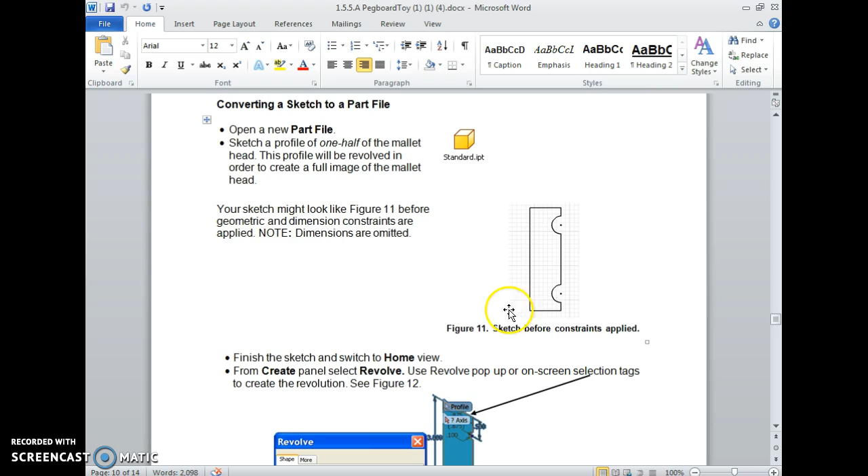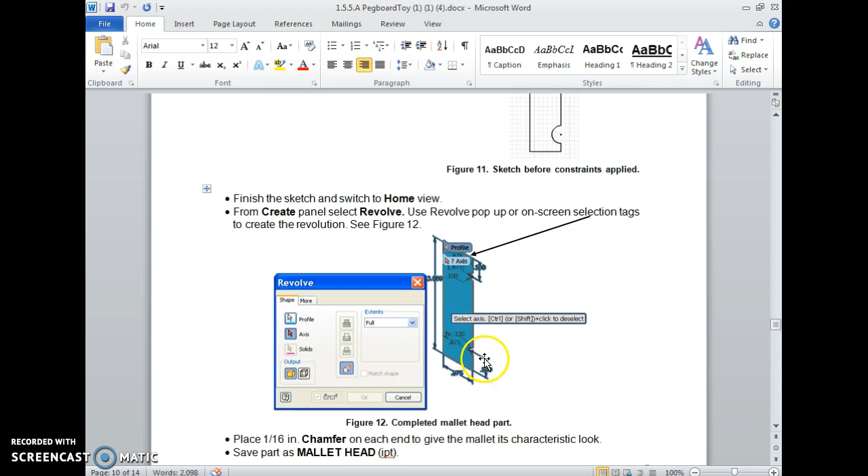And then after we revolve it, we're going to add a chamfer to round the ends off. If I scroll down a little bit, you'll see what the mallet head's going to look like when we get to that point.

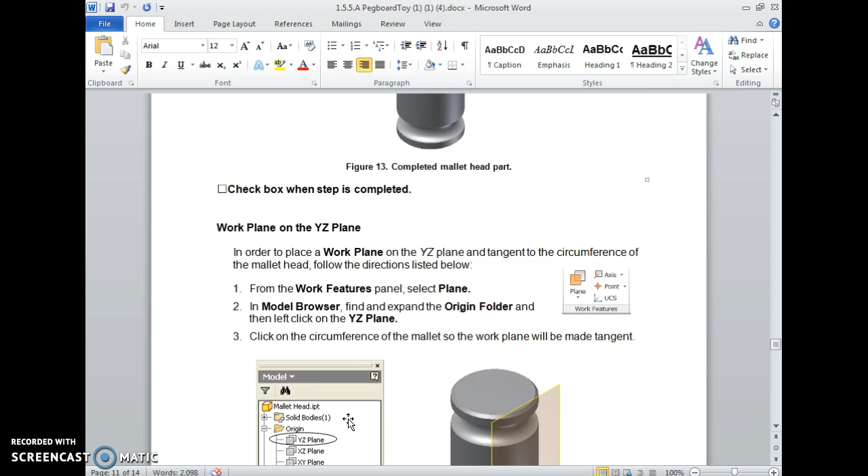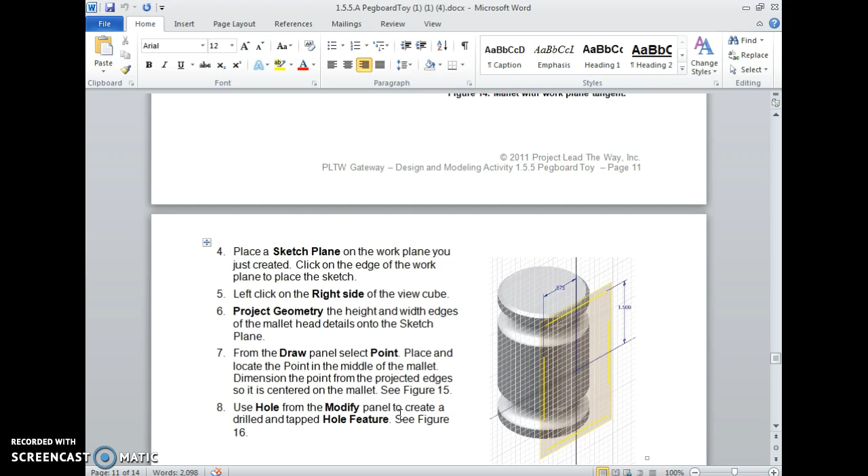Then we have to create a work plane to place a point for where the handle will thread into the mallet head. That's going to get a little tricky. Hopefully I don't mess up too bad. So let me scroll back up here and we'll get started.

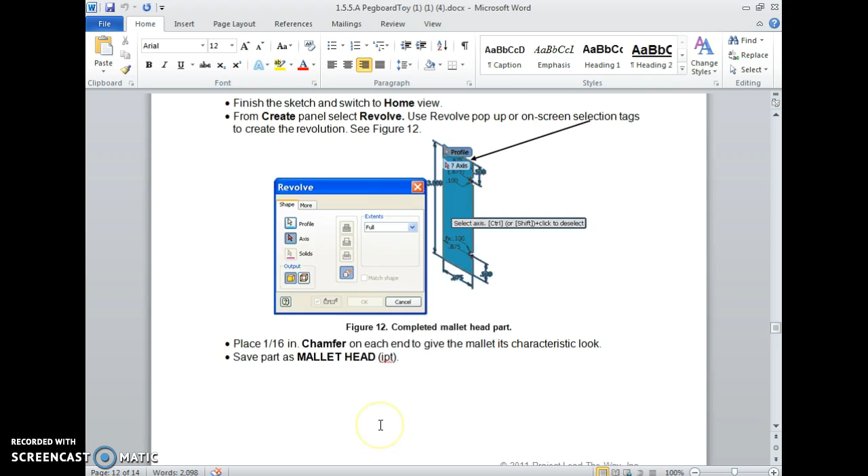So I'm in Autodesk Inventor. I already have a standard IPT open. I'm going to click on the pencil, click on the front view, and start with a line. I'm going to do a vertical line 3 inches tall.

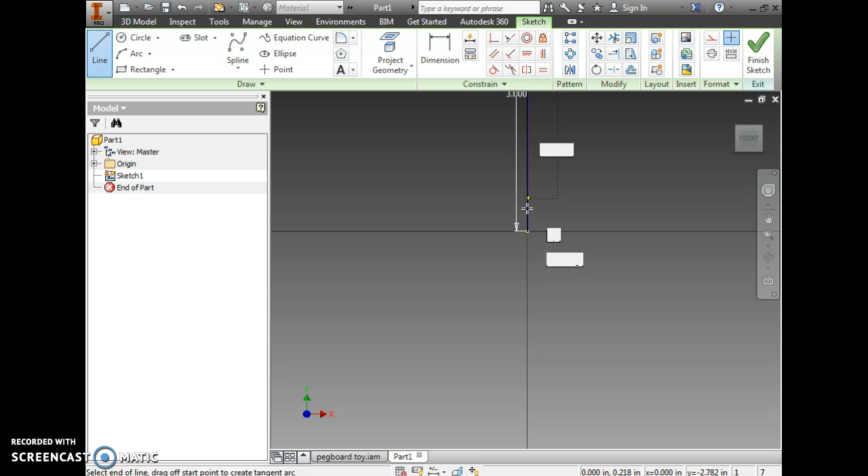Now there's also a way to start with a rectangle. I haven't done this in a while, so I'm going to start with a line. I'm going to continue to use my line tool, and I want to make a horizontal line that is 0.875.

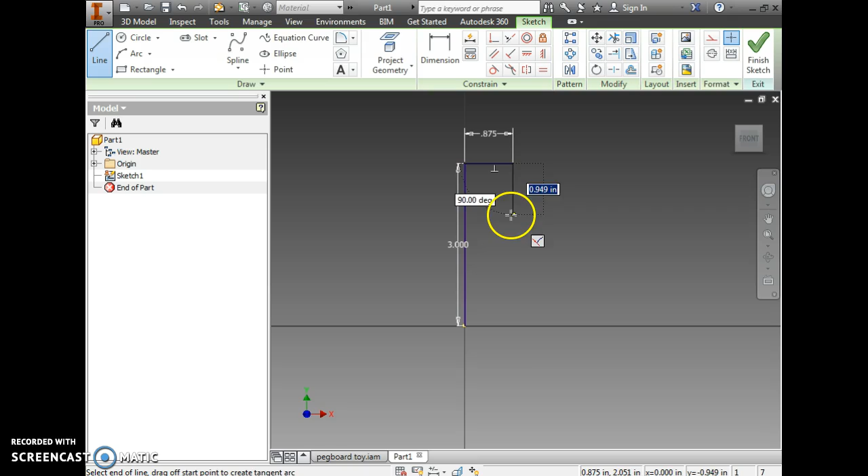So I'm doing one on the top. I'm going to hit escape to unattach my line. I'm going to put another line across the bottom. Make sure it's 0.875 - there's a guideline to show you that it lines up. So I'll go ahead and click that. Hit escape to unattach my line.

And then I'll go and place a couple points and constrain those with dimensions. One there, one there. This is going to be the center for the arcs that we have to place in, and they're going to be 0.5 from the end.

Okay, now I can use my arc tool, and I'm going to switch to a center point arc. In the past we've used 3-point arc - let's try center point.

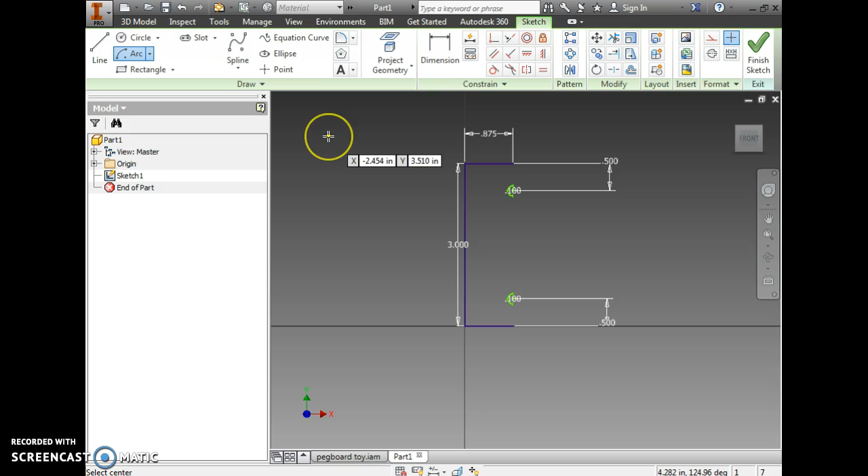We want to set our radius at 0.1, and then we're going to swing that around 180. So there's a little bit of a trick to it. Center point arc, click the center, keep it flat, keep it on that vertical axis. Type in 0.1, enter, and then swing it around to 180. So kind of a new feature.

Back to the line tool, and we got to enclose the profile. So now we have the profile of our mallet head.

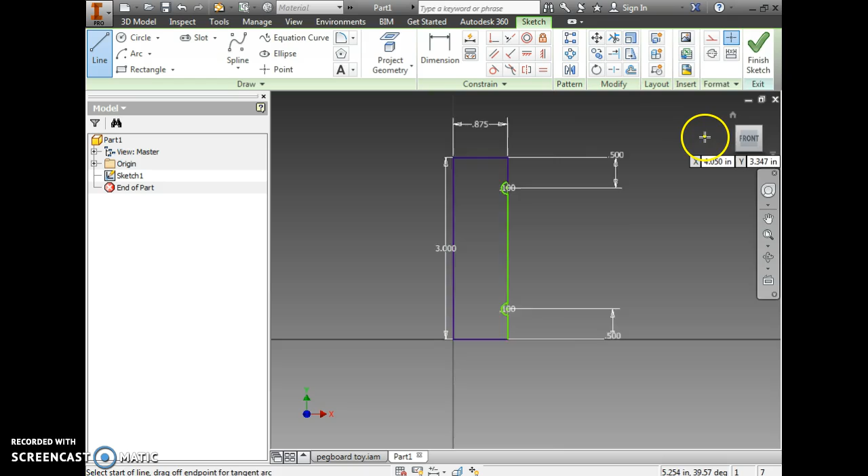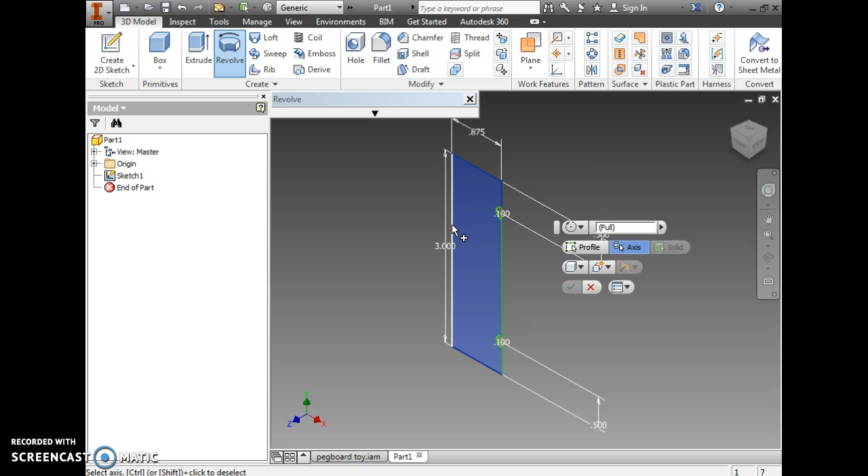We're going to go finish sketch, the little house on the view cube. We're going to go to revolve. Make sure it's set to full axis, and we're going to hover over the vertical line and click on it.

And then check it. Center that up. Now we're going to add a chamfer. A chamfer is going to smooth out these hard edges. I'm going to go chamfer. Our chamfer value is going to be 1/16.

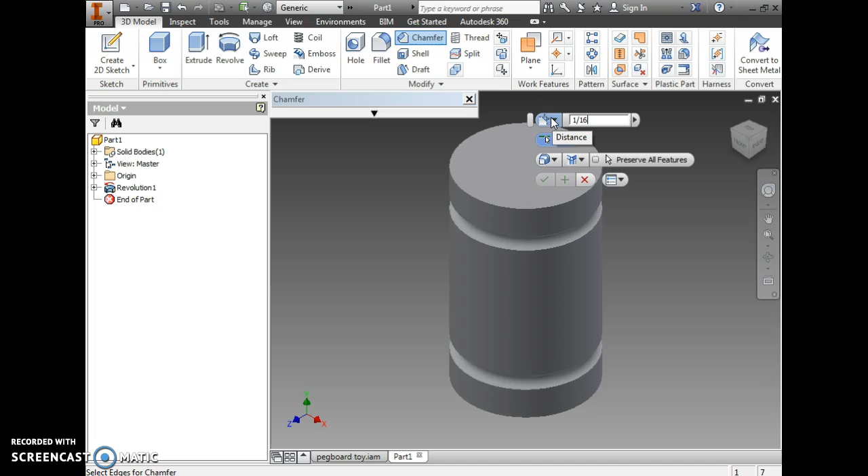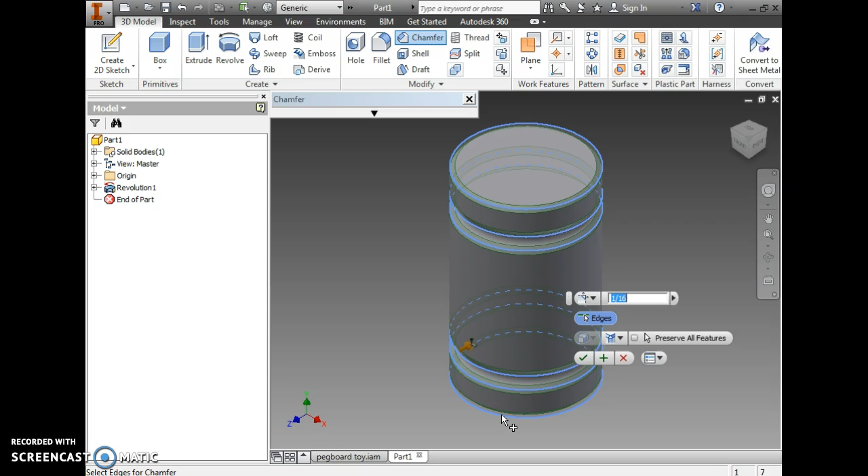And we're going to click 6 points. Top edge, where we did our arc in both spots, where we did our bottom arc in both spots, and the bottom edge. And then I'm going to hit enter after I've clicked all 6 points. Okay, well, we didn't get in trouble yet.

So now what we have to do is we have to place a plane for where the handle is going to thread in. So what I need to do is I need to look at my document to make sure that I select the right work plane. Otherwise, I could really mess things up. So in order to place a work plane, we've got to go to Work Features and select Plane.

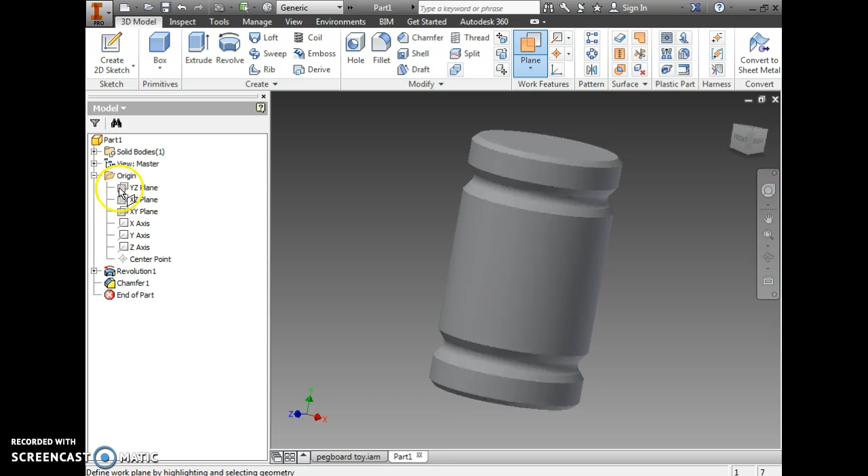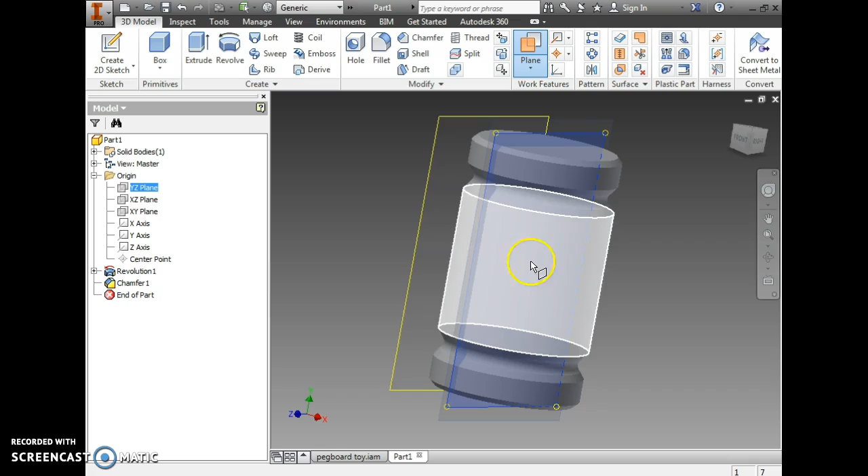Then we're going to go over to the model browser. We're going to expand the origin and select the YZ plane. And then we need to click on the circumference of the mallet. You'll see a yellow box appear on the outside, and you can get it on either side, but we want the one closest to us, so we'll click on that.

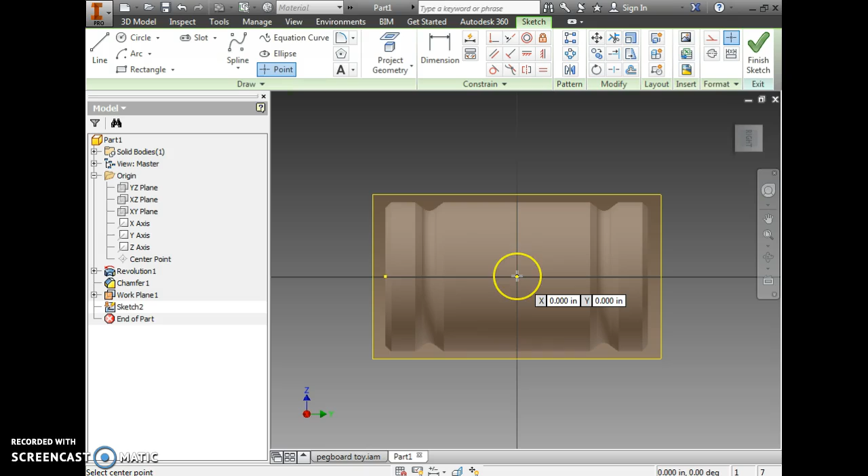Okay, now we're going to place a sketch plane on that. So we're going to click on the pencil, and we're going to click on the edge of that work plane. Let me grab my pan tool and pull that over. All right, we're in really good shape. I'm going to select a point, and I need to place my point in the center. I'm fortunate enough that everything's worked out so far that it lines up right with those crosshairs. So there's our hole right in the center.

So now we're going to go Finish Sketch, and we're going to use our Hole tool. And we need to check our document to look up those settings. So we want it set to distance. The depth is going to be 0.875. I typed that in the wrong spot. Well, depth up here. The top one is going to be 0.875, and the bottom one is going to be 0.75. I forgot the point. 0.75.

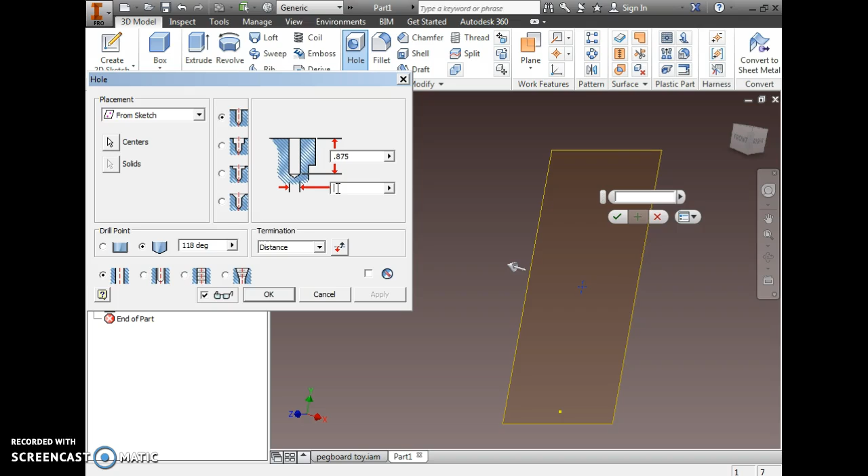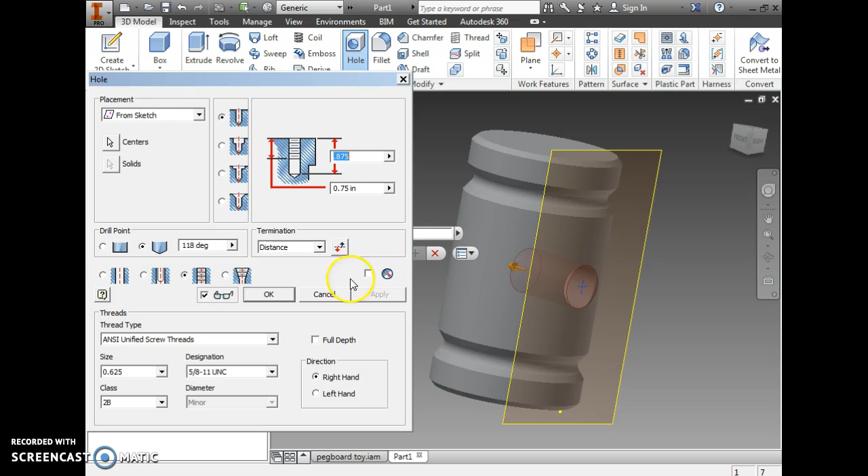And then we need to come over here and select a tapped hole. That means it's going to have threads. And it's going to freak out my computer. There it goes. So we want to make sure it says ANSI, Unified Screw Threads. The size is 0.625. It's going to be 5/8-11 UNC. That's just the type of thread it's going to be. And let's check it and see if we do all right. Look at that.

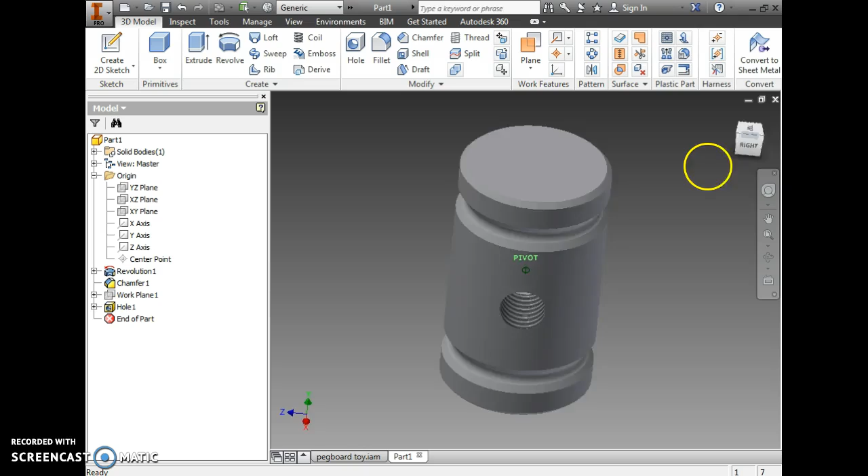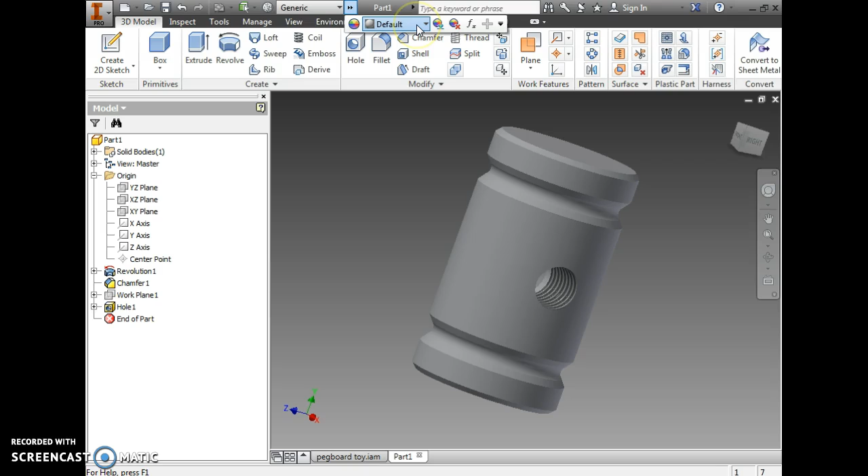So I'm going to go over here. I'm going to right-click on Work Plane, get rid of that work plane, turn off visibility. And then we can select a color. Let me look at my document, see what color they gave for it. I got to go up here to the top of it. I'm scrolling through on my Chromebook. It's always a good idea to have that document open for reference. I have to follow along to it. It says purple. I wonder if I'll even be able to find purple. Oh, there we go, purple.

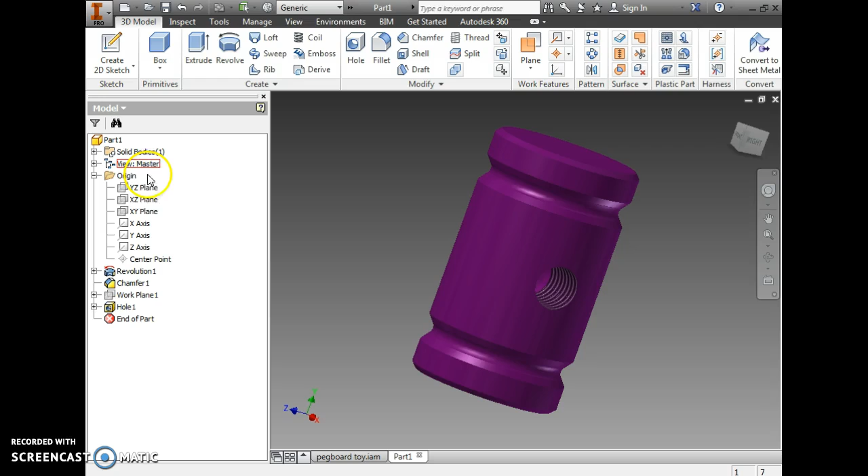All right, so I'm going to go ahead and save my mallet head. So I'm going to click on the I. I'm going to go save as. There we go. Make sure I'm in the right place, and I'm going to call it Mallet Head. I'll probably have to replace it because I've done this before, but I'm doing a new one and I want to keep fresh files on my computer. Replace? Yes.

That's a bad sign right there, but it's probably because I didn't restart my computer over the weekend. Anyway, that's the Mallet Head. Hopefully you will have good luck on it.